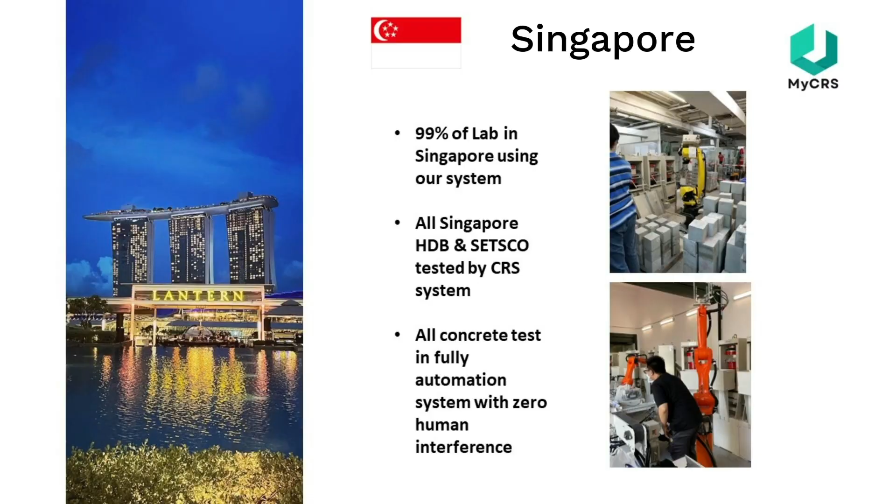I'm Thomas. I'm the founder and inventor of MyCRS. I have a bachelor degree in E&E. For the past 15 years, I have been inventing machines for the construction industry. I have been involved in designing testing systems for mega projects in different countries, such as Dubai Central Lab, MTS system for Hong Kong, and CRS system for Singapore. I am proud to say MyCRS is my brainchild, and I am excited to continue innovating in this field.

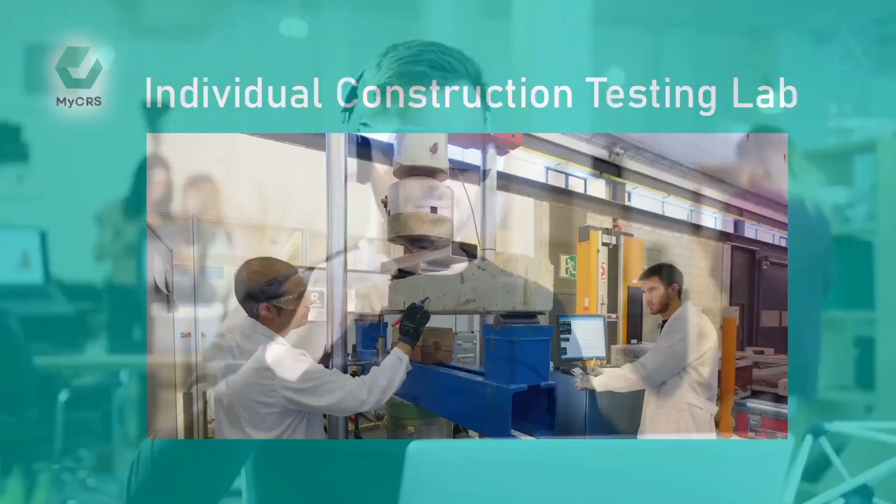Our mission is to ensure that every home is safe to stay and fair to own. MyCRS is actually a system that comes with 3 innovations to modify the existing concrete testing flow into a cloud-based and big data platform. It is an IR4 tool developed by Malaysians and has been tested and used in Singapore and Hong Kong. It provides an online traceability solution and transparent tools for government to control and monitor the quality and process of construction. Our intended users are individual construction material testing labs and also government testing labs.

As for our marketing and commercialization strategy, it is to conduct seminars in the private and government sector, as the MyCRS system can significantly simplify and reduce human error in cube report generating. There are different business models. To promote this system, one of the options is to sell an upgrade at 30,000 to upgrade their existing old machine, or buy a new one at 120,000 per unit. Another plan is to charge on lab report generation by software, or we can run on a rental basis.

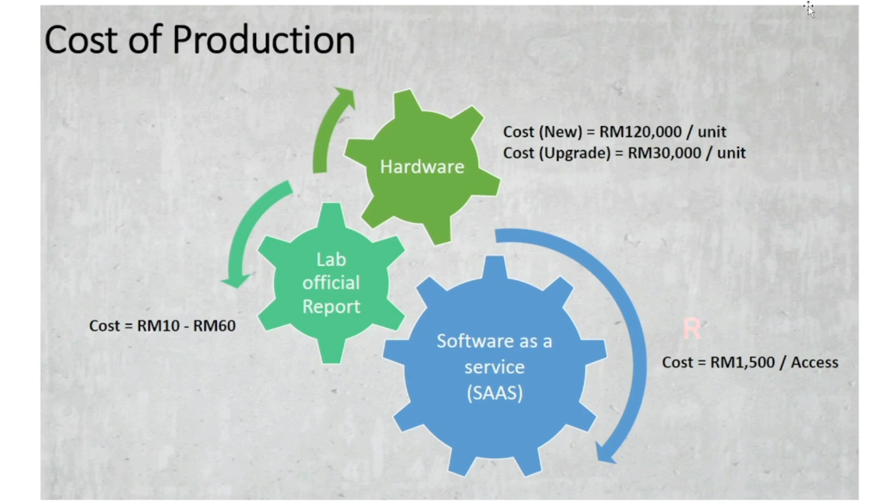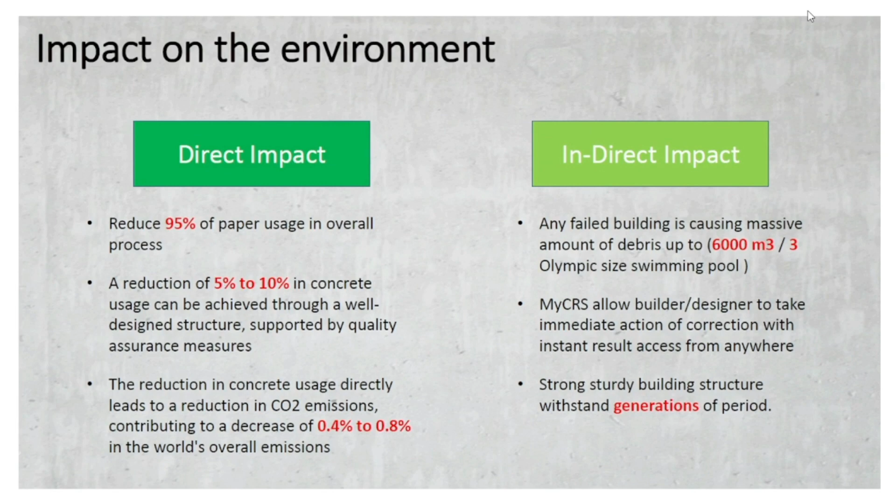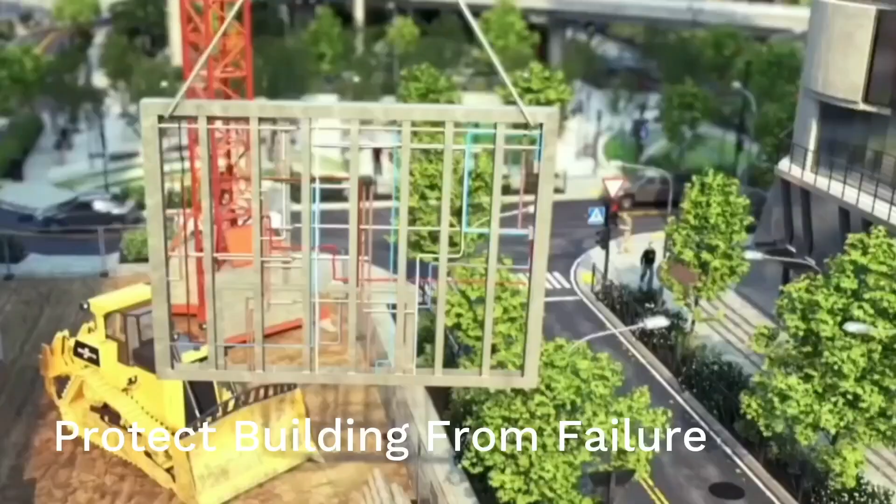According to CIDB data, there are 33 million cubic meters of concrete generated per year. With the MyCRS system, it brings direct and indirect impact to the environment. One of the direct impacts is that it will significantly reduce paper usage in the industry at 95%. With the system, engineers can plan their structures better and reduce usage of concrete, which directly leads to reduction in CO2 emissions. With the MyCRS system, it will indirectly improve the toughness of buildings and protect them from failure, which could cause massive wastage of concrete. Therefore, with the MyCRS system, it improves working efficiency by 300%, saves paper, and improves performance by 30% in the overall concrete industry.

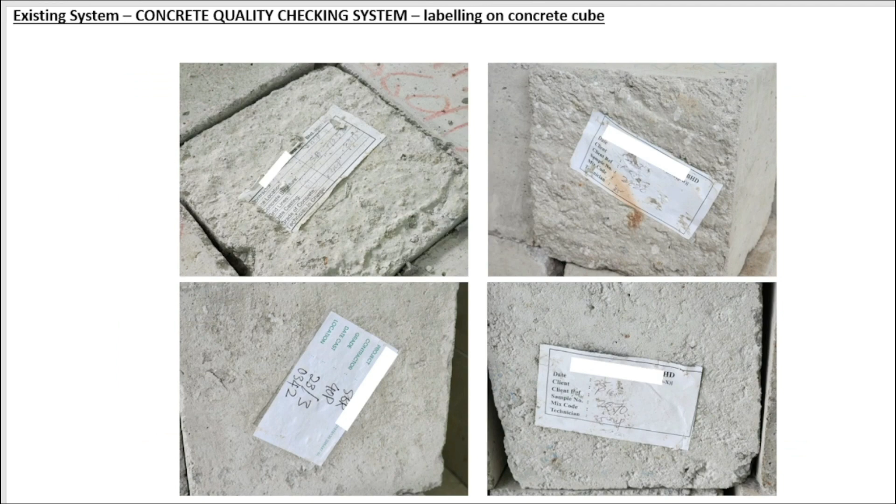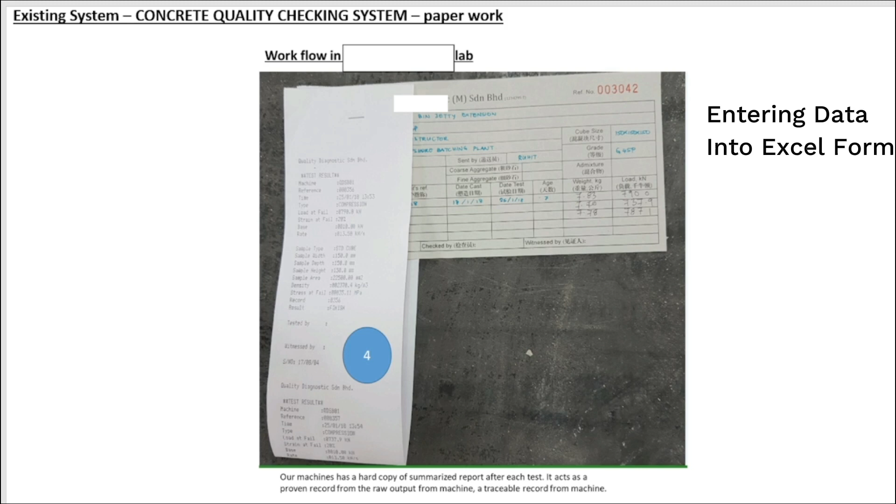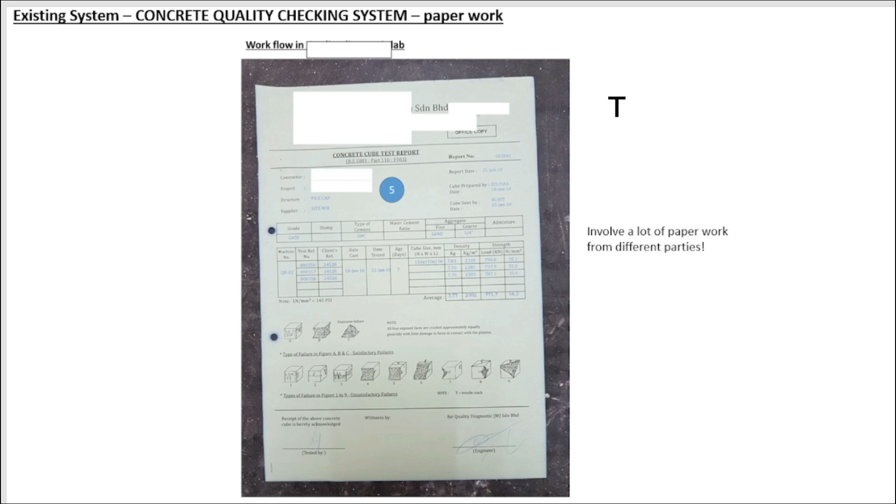In concrete compression testing, the technician casts the concrete cubes and adds information like the date of casting, project name, and location on a piece of paper stuck on the sample. The cube is then cured in a tank for 7 to 28 days before being taken out for weighing, measuring, and crushing. After breaking the sample, the technician records the ultimate strength on the lab work order. Generating a report requires manually entering the data into an Excel form. The current process is paper-based and bulky, making it prone to human errors like reading and typo mistakes, testing the wrong samples, replacing low-quality samples, or manually altering test results. I'm going to explain the new innovation.

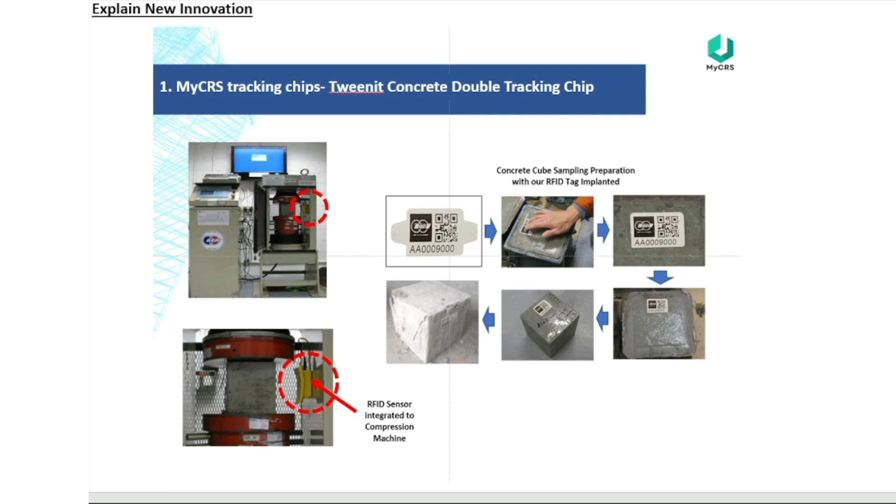MyCRS is actually a system that comes with 3 innovations. The first one is the MyCRS tracking chip, named the Tweenit concrete double tracking chip. Second, the MyCRS touchscreen. We name it the concrete IoT precision contrivance. Third, the MyCRS phone apps and backend system. We name it the concrete hybrid checkpoint operating system.

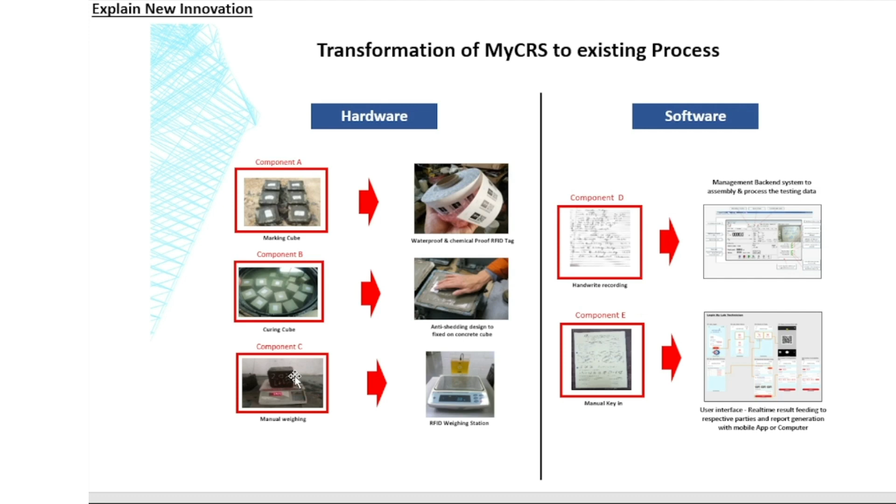As referred to in the previous slide, there are components A to E. We use the Tweenit concrete double tracking chip to improve components A, B, and C. Then, we use the concrete IoT precision contrivance to improve component D. It is actually an attachment top box which complies with international standards while enhancing the existing process, bringing in IR4 technology to transform the existing old-style compression machine with the latest IoT capabilities. Also, we have the concrete hybrid checkpoint operating system to be installed in all handphones with the Android system to ensure that the whole process is transparent, with world-certified security and higher traceability.

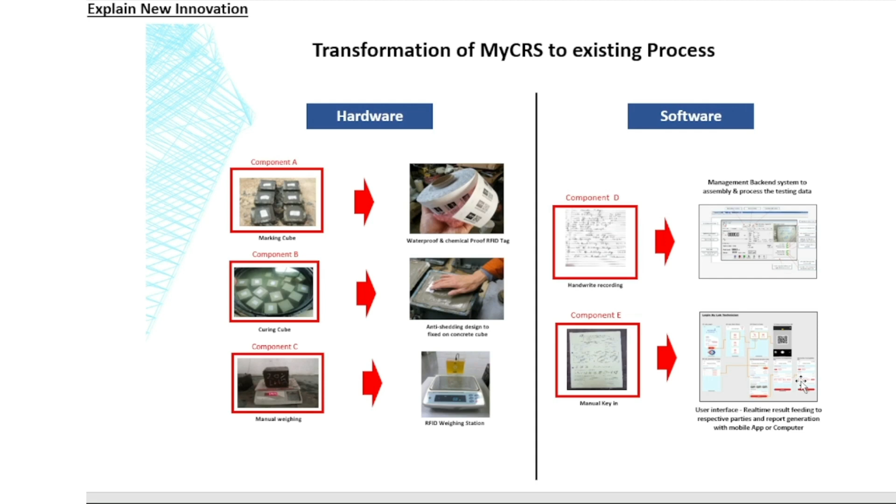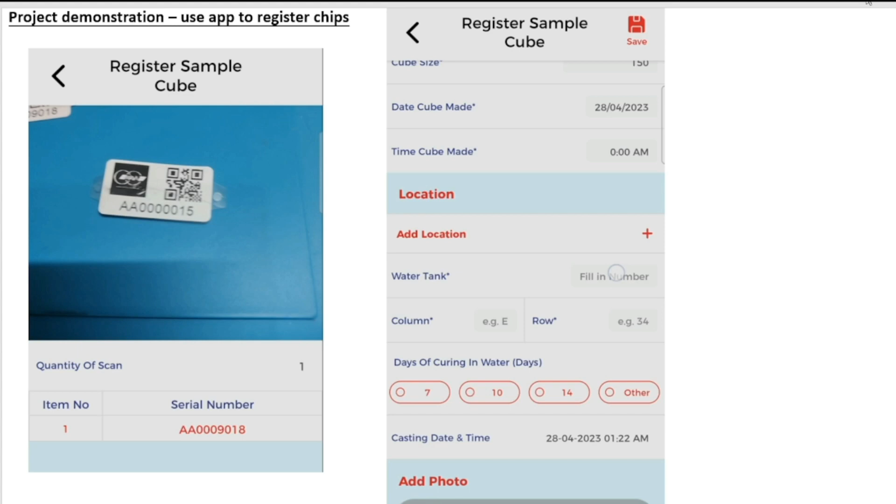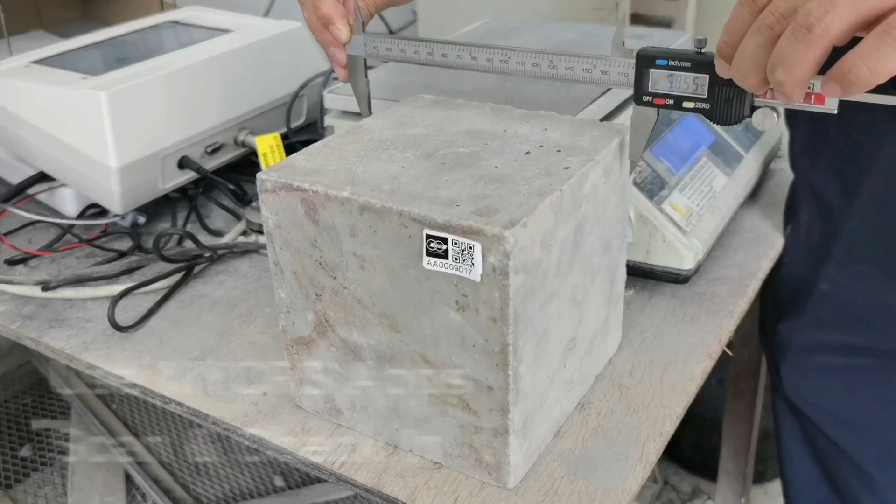Imagine a client has a site project, and an office worker will register the tracking chips, then distribute them to the site workers. While pouring the concrete at the project location, they will cast 3 to 6 samples. Site workers will use a handphone to scan and mark the chip that has been installed on the samples. Once the curing is done, samples will be taken out and sent to the nearest testing lab. Now I'm going to describe the project demonstration part. They can choose the lab from the MyCRS pre-registered lab list. The lab will receive the notification and prepare space and a time slot for testing. Upon receiving all the samples, the lab worker will use the MyCRS app to scan and check in these samples. These samples will be measured and weighed before being carried to the crushing machine to get their ultimate strength.

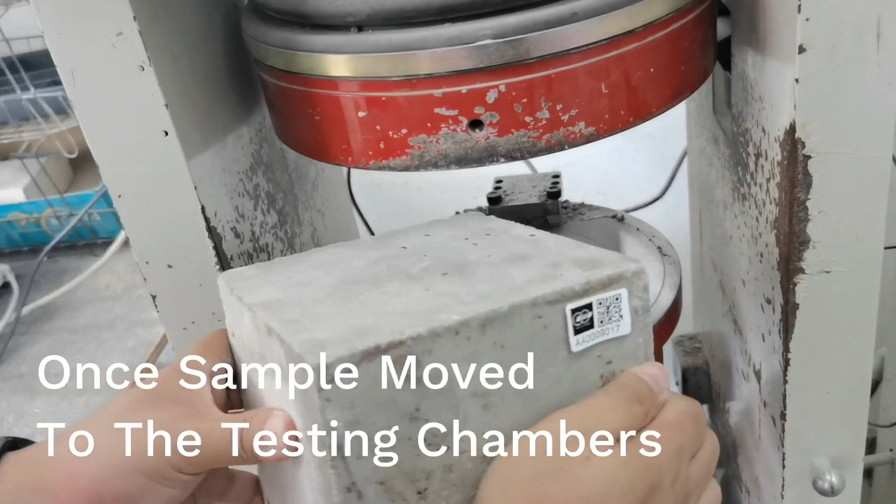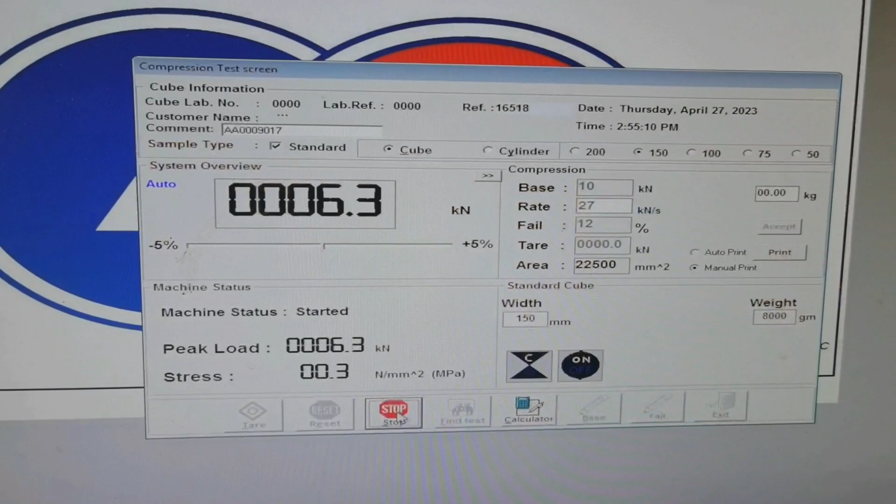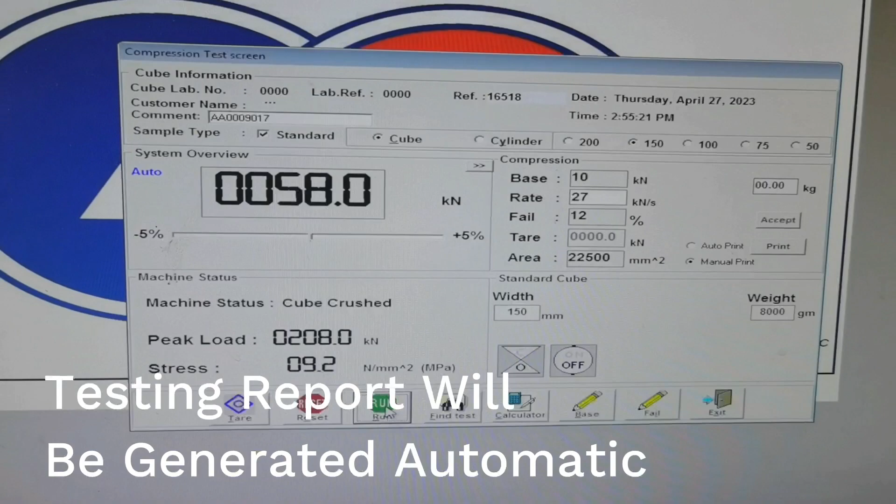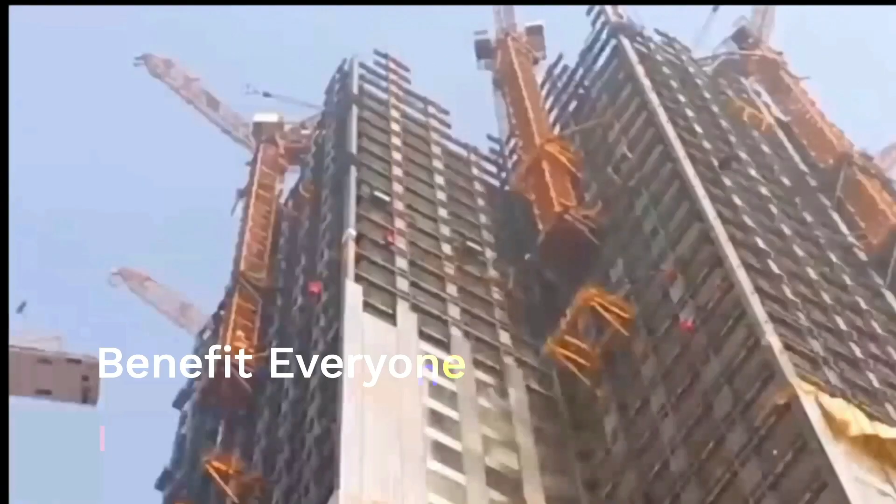This project benefits everyone involved in construction: banks, homeowners, governments, developers, consultants, architects, and contractors all benefit from it. Our technology helps the construction industry to ensure public safety by monitoring the quality of building materials. It's exportable worldwide and supports the new design code applied in Malaysia. With 6.7 million properties in Malaysia and 32,000 new houses built every year, our technology ensures that all building materials have a traceable history and a clear record of quality. This provides transparency and accountability in the industry and helps prepare us for potential risks. With our solution, public safety is well taken care of.